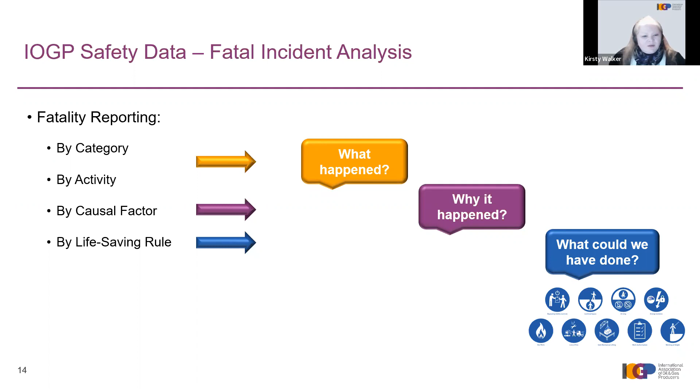If you can go to the next one, please, Alex. Thank you. So all the data I'm going to be presenting today, with one caveat, is available on the IOGP Safety Data website, which is data.iogp.org. This is all publicly available information. And on that website, you get the safety performance indicators reports from the last few years. But you can also drill right down into the fatal incident to look at the narrative description, the what went wrong, the causal factor, and also get the activity, the cause, and the life-saving rule for each of those incidents.

Now, the caveat is that for the 2021 data that I'll be presenting today, that has not yet been finalized. The 2021 Safety Performance Indicators report should be available within the next month or so. Next slide, please, Alex. Thank you.

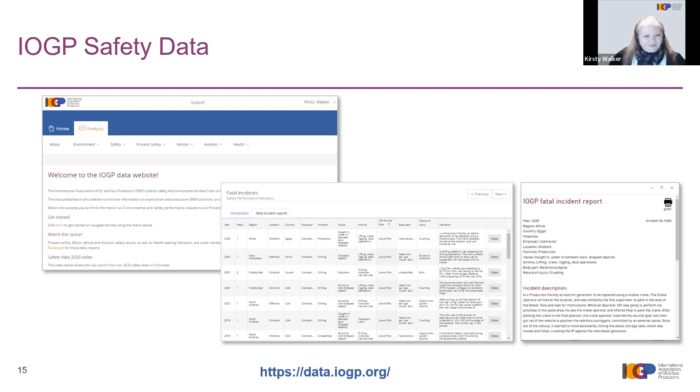So within the Safety Performance Indicator data, as I said, we can look at things in terms of the categories and activities. So the data analysis that I've done for this particular presentation is from 2005 to 2021. This includes 1,085 fatalities in 817 fatal incidents.

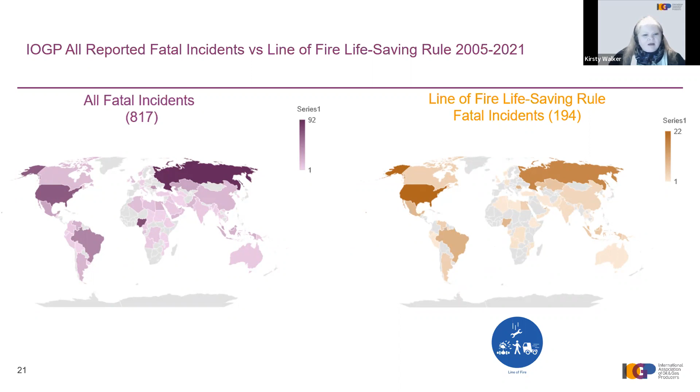One question that I'm quite often asked from members of the IOGP Safety Committee is whether or not there's any particular geographic influence on fatalities or fatal incidents, particularly around line of fire. On the left-hand side here, you can see all of the fatal incidents plotted geographically. On the right-hand side, the ones related to the line of fire life-saving rule. And as you can see by the depth of color on both of those charts, there is really no specific geographic influence over this particular metric.

If you can move to the next one, please, Alex. Thank you. So one of the largest categories we have within line of fire is this working around mobile equipment. And this is where the information in the narrative descriptions, the causal factors of what went wrong, really helps us to try and understand a little bit more about what actually happened.

So out of these 57 fatal incidents, 31 of them involved trucks, so heavy vehicles. 21 of them involved construction equipment. This may be bulldozers, JCBs, diggers, road graders, road rollers, that kind of equipment. One involved a forklift, one car, one train, one bus, and one crane, which was not actively being used as a crane at the time, but was essentially just still a piece of mobile equipment.

So although in many instances we actually engage a signaller, a banksman, to guide vehicles, we've seen that 11 of these people who were actually put in place to prevent people getting impacted by this type of vehicle have themselves succumbed to fatal injuries as a result of their position in relation to the mobile equipment. 14 incidents involved reversing.

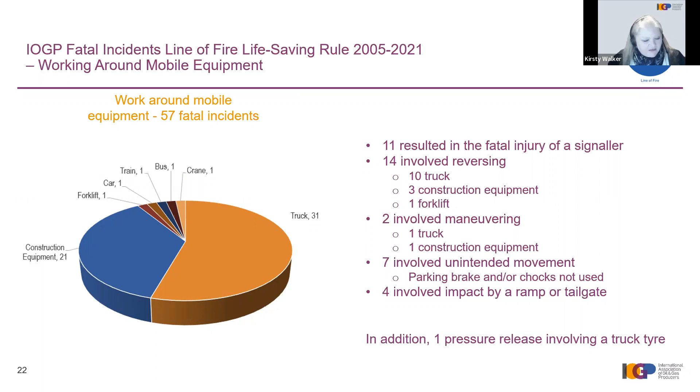So what did we do in terms of the lessons learned? Well, we went back to the IOGP Safety Committee, who then engaged the Land Transport Subcommittee to develop a recommended practice around mobile construction equipment.

This is publicly available, free of charge. You just need to download it from the IOGP website. This document gives advice on risk-based traffic management plans, first move forward, i.e. avoiding the need to reverse, providing space for maneuvering, use of dedicated parking areas, chocks and immobilization devices, and also the use of signalmen or banksmen.

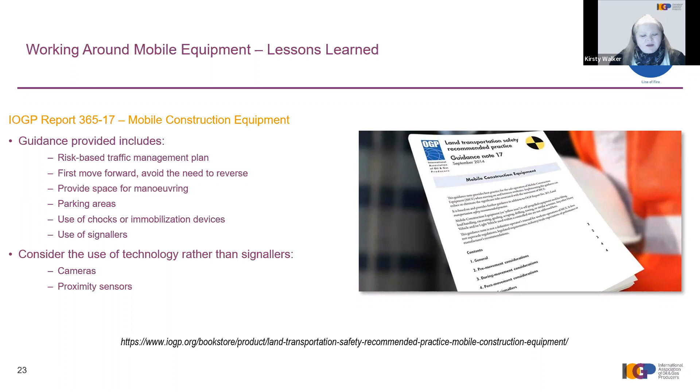But this is an area where we really can benefit from the use of technology rather than having signalmen or banksmen. We can use cameras and proximity sensors on some of these types of mobile equipment. If you can move to the next one, please, Alex.

Now, another aspect that we've tried to really bring the learning from the incidents that have been reported is in the development of our start work checks. These were released at the end of 2021, back in December, and there are 13 of them. These are intended to supplement the IOGP's life-saving rules by giving people a very simple checklist to conduct before they undertake certain types of activity. There are 13 of these, one of which is working around mobile equipment.

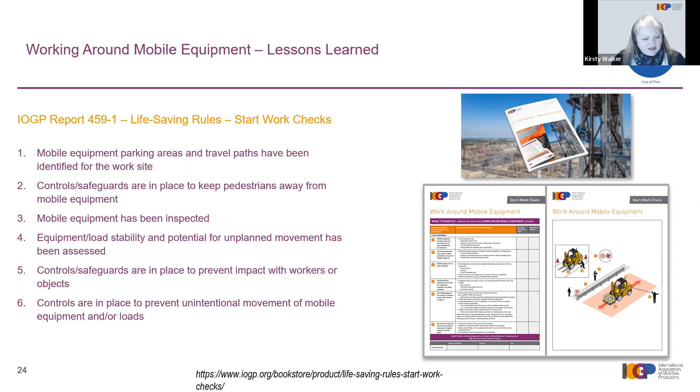The checks are very, very basic: mobile equipment parking areas, travel paths have been identified for the work site, making sure that controls are in place to keep pedestrians away from mobile equipment, making sure the equipment itself has been inspected, load stability, potential for unplanned movement has been assessed, and that controls and safeguards are in place to prevent impact with workers or objects, and also that controls are in place to prevent unintended movement of mobile equipment and or loads. You can see from the previous data that we've tried to incorporate those lessons into the start work check.

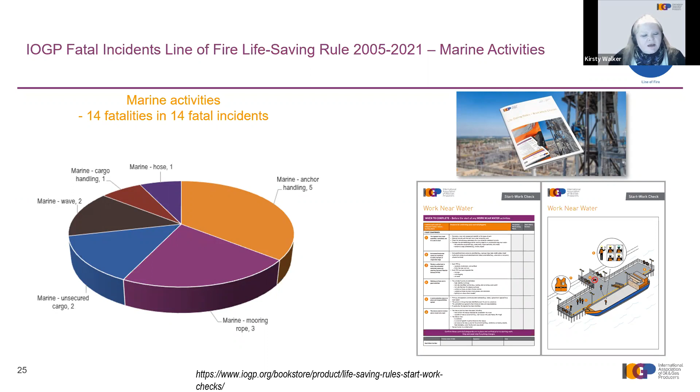Now, another aspect of line of fire is in relation to marine activities, and I'm sure Nick will be giving you some more information on that later in the session. Here we have 5 related to marine handling, anchor handling, 3 related to marine mooring ropes, 2 unsecured cargo, 2 specific to actual waves themselves, another one on cargo handling, and 1 more on the marine hose. So 14 fatalities in 14 fatal incidents. We do also have a start work check on working on or near water.

So some of the other key ones that have come up through the line of fire data analysis is looking at stored energy, energized equipment, and dropped objects. We do have a specific activity category for dropped objects that was introduced in 2019. We do have some specific data on dropped objects, but these are the ones that have been assigned the line of fire life-saving rule specifically.

So for the stored energy or energized equipment, we've had 6 fatal incidents involving wire under tension that were not marine related, 6 involving impact by beam pumps, 3 entanglements in rotating equipment, 1 involved a winch under tension, a stored energy release when cutting pipe, a rotating pump, and a rolling object.

On the dropped object side, mainly from the seismic part of the industry, 10 were related to trees, 8 during deliberate tree felling activities. And IAGC, the International Association of Geophysical Contractors, has identified that tree felling is actually one of their major causes of fatal injury within the land seismic industry.

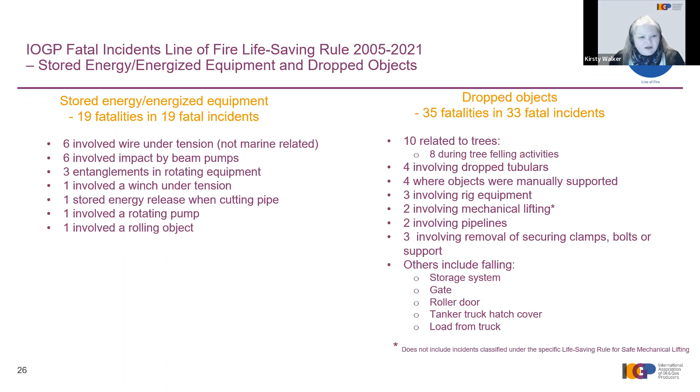So a few more there that you can see with gates and roller doors. On the mechanical lifting side, these are again just the ones in the line of fire life-saving rule category. 7 involved a suspended load, 3 resulted from failure of lifting equipment, 2 from load swinging, 2 from the use of construction equipment for lifting. This is construction equipment that was not designed for lifting, for example, putting slings onto the bucket of a digger. Loading, unloading, again, a lot of these were tubulars.

A particularly nasty one where an operator got caught between a boom truck and the boom itself. And the rest were related to loading activities with skid mounted equipment, trailer ramps, and a forklift operation. Okay, next one, please, Alex.

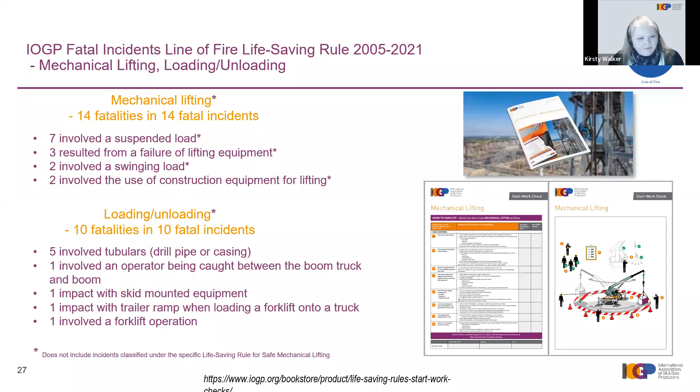So the causal factors also give us another opportunity to look at line of fire from a different direction. From the causal factors assigned for these fatal incidents, we've had 110 assignments of improper position in the line of fire. That's 6.2% of our fatal incidents from 2010 to 2020. We only started requesting the line of fire data in terms of causal factors in 2010.

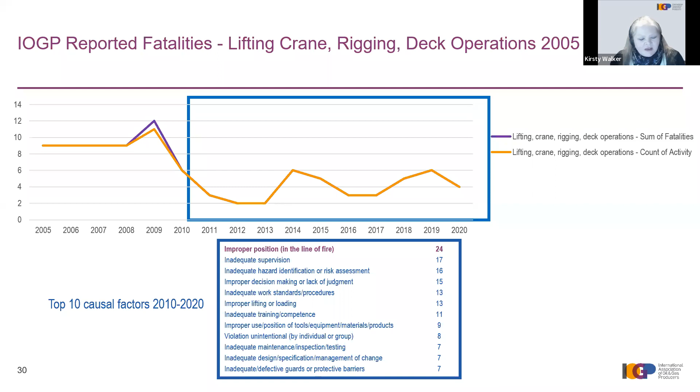In particular for mechanical lifting, out of 45 mechanical lifting related fatalities, 24 of them had improper position in the line of fire. So it really does emphasize the need to manage access to areas where mechanical lifting is being conducted. Really manage your red zones. They absolutely do save lives.

So process safety events. I've put a couple of slides in here about process safety events as well, knowing that Tijs was going to be talking later. Again, the analysis of this data is what was used to develop what IOGP call the process safety fundamentals. This is data from 2007 to 2016, where we did an analysis on 56 process safety events. These are all tier 1 process safety events that resulted in a fatality.

Now, these fatalities are either ignited or struck-by events, almost half of them being ignited, the other half pretty much struck by. These have resulted in 128 fatalities. But the ignited events have resulted in 75% of the fatalities, even though they were 50% of the actual fatal incidents. And almost all of the fatal incidents involving 4 or more people having been killed have all been related to ignited process safety events.

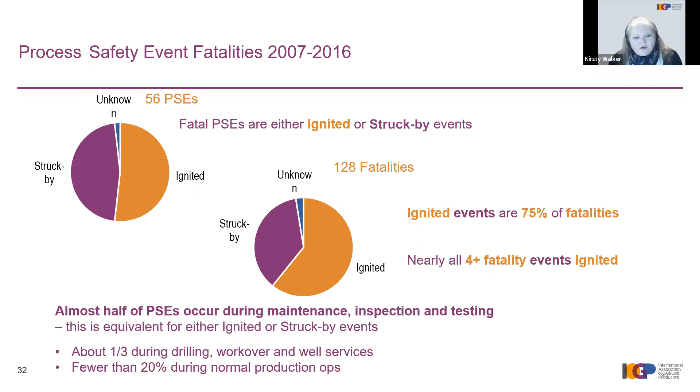But a third of these are during drilling, workover and well services, but less than 20% of them during normal production type operations. And again, the data that we've looked at from the causal factors for process safety events, this is data from 2010 to 2019. Line of fire, you can see, is pretty high up on the causal factors in terms of those incidents that have been reported to IOGP during that time period.

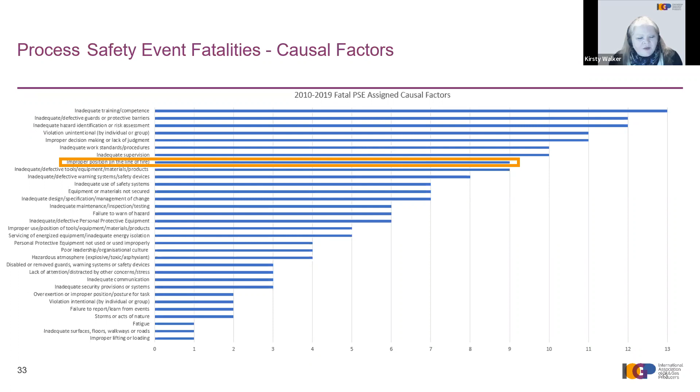And this went to inform the development of the process safety fundamentals, which are slightly different from the IOGP life-saving rules. The life-saving rules are very much for the individuals involved in a particular activity or task and the actions they can take to help keep themselves and others safe. Whereas the process safety fundamentals are more around the kind of organizational type responsibilities, although there is an individual contribution aspect to them. And these, again, the IOGP process safety fundamentals are available free of charge from the IOGP website. The links are on the slides.

So you can see here from those pressure release incidents that we've had 18 fatalities in 17 incidents. The majority of them have been as a result of debris that has been expelled during a pressure release or explosion. There's also 3 related specifically to pigging operations, 3 related specifically to pressure testing, 1 related to a well control incident, and 1 related to a well control flash fire. So again, we've got quite a wide range of incidents categorized as line of fire within the process safety data reporting as well.

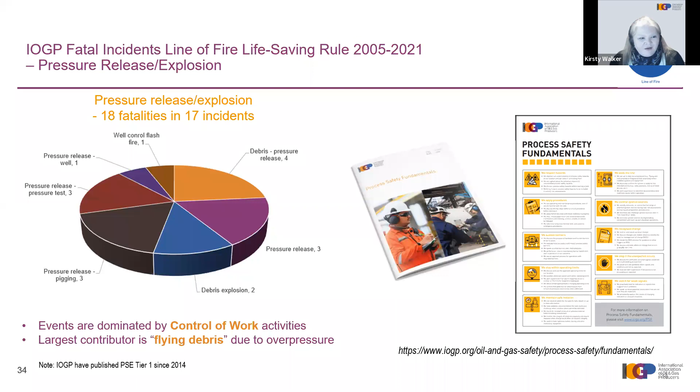And again, IOGP do report separately process safety event indicators and have been doing so since 2014. All these reports are available from the IOGP website if you are interested in any further information on those.

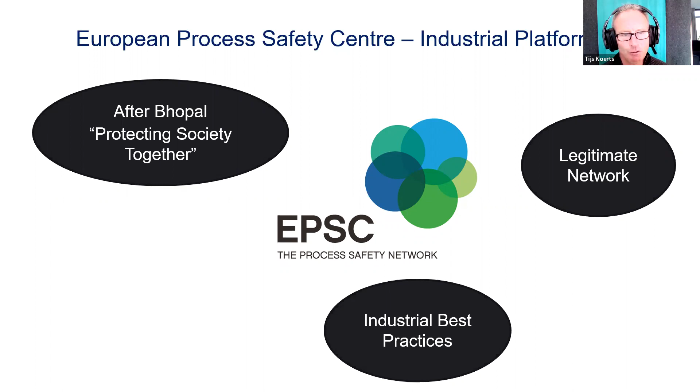Let's go one more slide further. Kirsty already gave you a good insight into how we went the pathway of safety. What helped us a lot was the life-saving rules, and all companies have defined those well. On top of that, we felt the need to develop something called the process safety fundamentals, and I'll focus on the difference, because that's really helpful when you have hazardous chemicals on your site.

I'll go a little into the differences between these three. There's a strong focus on avoiding injuries and fatalities in occupational safety, in the life-saving rules, while the process safety fundamentals focus on avoiding loss of chemical — often called loss prevention. That's the key focus.

The HSE domain is where everybody is involved. These are pretty obvious, simple rules, like buckle up when you're driving, or if you work at height, you are tied off. Straightforward rules. Whereas the process safety fundamentals involve the people really involved in hazardous chemical operations — typically the operators and the mechanical maintenance people.

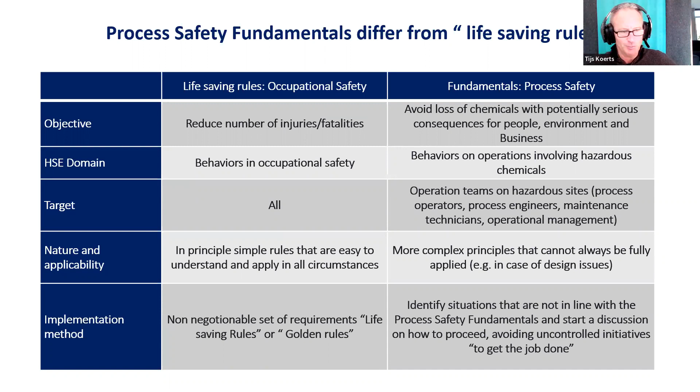So let us go into the pictograms that we developed. These were all developed in line with OGP at about the same time, but not only from oil and gas producers — the chemical industry was also involved.

For process safety, we already have the management system — things like hazard identification, process hazard analysis, management of change, incident investigations. All these principles are developed well, described well, and the booklets are there. So we need to go the next layer down to the people involved in these incidents, very often operators, operational people, and maintenance people, maybe a little design, but these people have been off-site for a long time. So we need fundamental principles to guide people on process safety excellence.

That's basically it, and I'd like to show you a few of those. I hope most of you recognize them — maybe we shouldn't go into all the details, since we're focusing on one today.

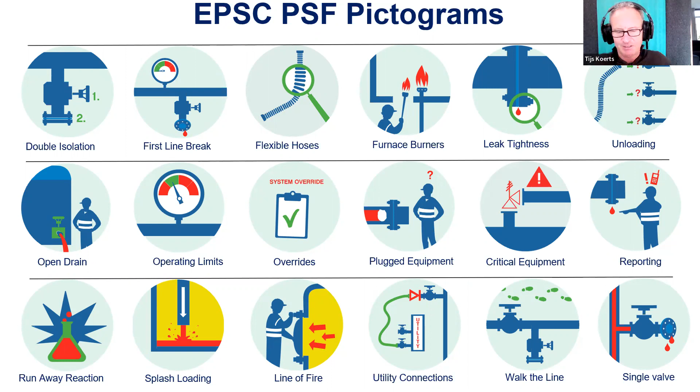Today we will talk—and I see the last line is following up—about do not stand in the line of fire. Let's get to the next slide and talk a little further on that.

One of the 18 pictograms I just showed you—and by the way, I forgot to mention, just like OGP, we have a nice booklet where these things are written, a bit of guidance on how to use them. It has pictures of all the pictograms, and on each one an explanation. That booklet is easy to obtain, free of charge, in several languages. Just look at the website of EPSC, epsc.be—it's in Belgium. Type in epsc.be, click on process safety fundamentals, and you open the booklet. You can also get versions in other key European languages like German, French and Italian.

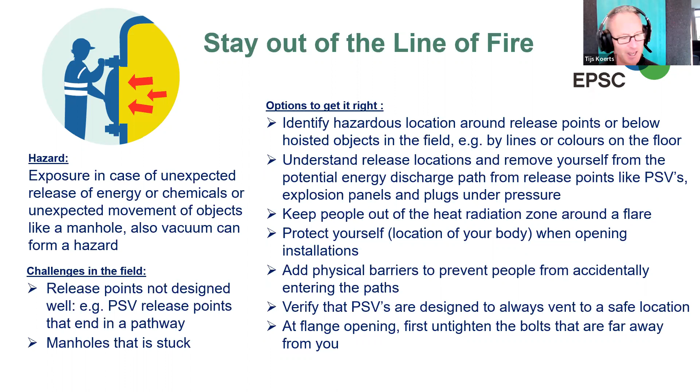Okay, let us go to one more, a little bit of a last one. What we did is EPSC offers you learning sheets. We take a typical incident in the chemical industry that happened most of the time in Europe.

One of our member companies said we had an incident where we want to share some of the learnings. Last year, these learning sheets were made available in about 15 languages, so most European languages are being covered right now. If you want to get them, just go to epsc.be, this is the website, and you can use them there. You can even register yourself so automatically each month these learning sheets are sent to you.

So last year, what we did was relate the incidents to one of the process safety fundamentals. Here a very typical thing was being done: a new part of the refinery was started. They used an old, existing pipeline, cleaned it, and then started using it for transferring naphtha to the unit. Naphtha is extremely flammable.

Now here you see the problem: in that unit, one of the drains was still open. So they started using equipment which was not closed, and they did not validate this. So what are the process safety fundamentals that should have helped here? A very important one is validate leak tightness - that means as soon as you're going to put hazardous chemicals into an installation that has been opened, you first validate that the system is leak tight.

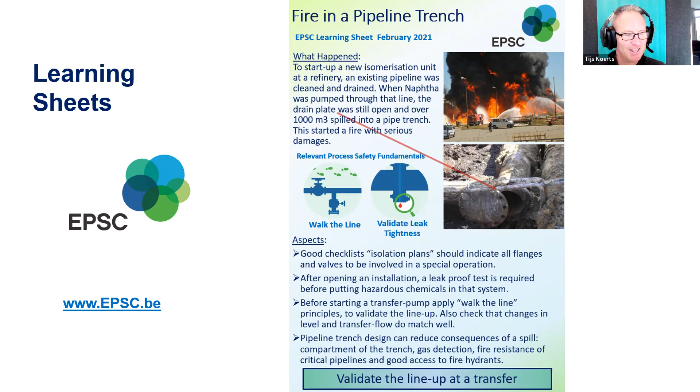The good news is that we're trying to include these learning sheets as well in the EI toolbox, so in the future you should be able to get these learnings from there too. So for me, this is thank you for your attention, and I'm looking forward to answering some of your questions.

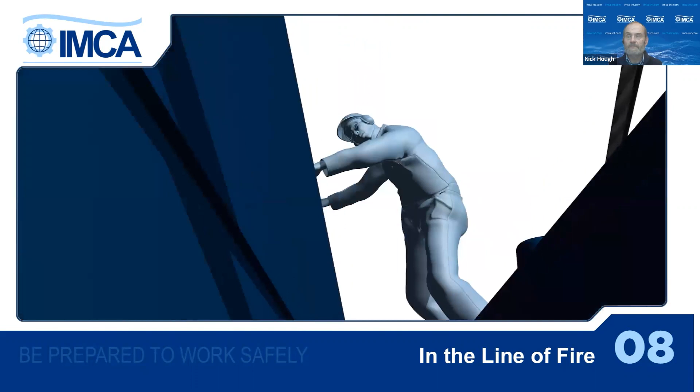Getting caught in the line of fire, that is, being struck by or caught between two objects or entangled in machinery, can result in serious injury or even death. Watch out for potential pinch points. Know how to avoid being in the line of fire. If you're not concentrating, if you're tired, distracted, or rushing the job, your attention could wander. You may not realize you're standing in a place where you could be struck by or caught between objects that might come together. You're in the line of fire. The same thing can happen if you're not properly trained or prepared for the task, or if you're working alone or visibility is poor.

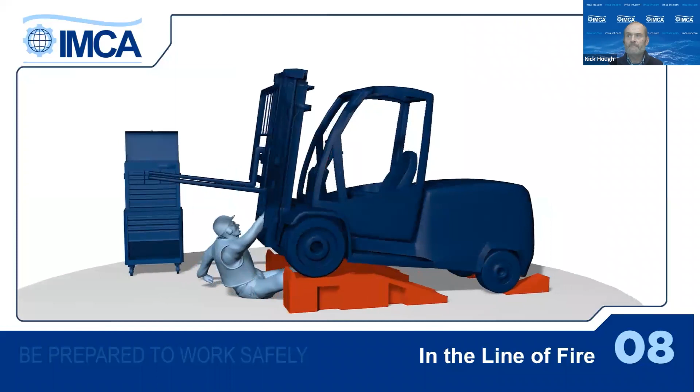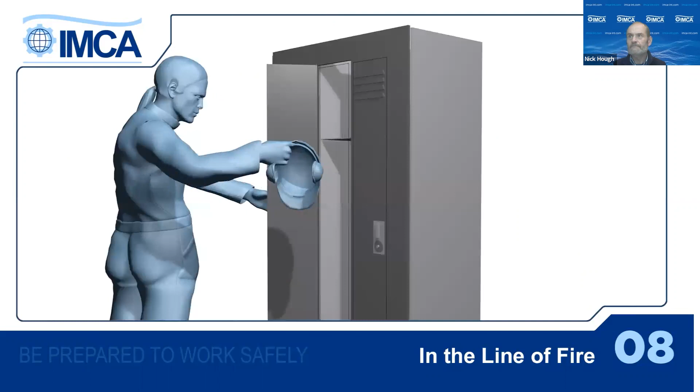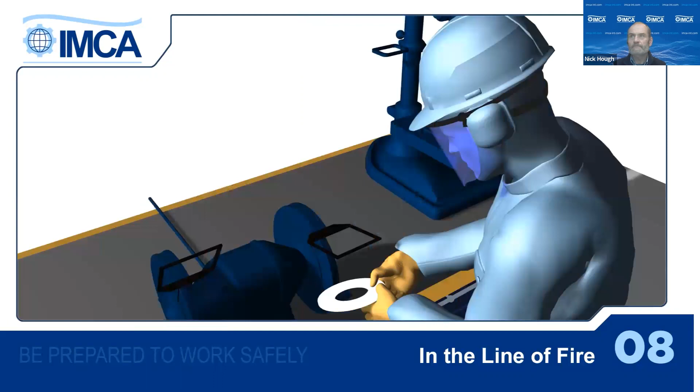Don't work on unsafe or uncertified equipment which doesn't have the right safeguards. If the job involves moving or rotating machinery, stand well back. Wear the correct PPE. If you've got long hair, tie it back. Take off any jewelry and don't wear loose-fitting clothes. Make sure there are guards in place to prevent contact with any moving parts. Before starting a machine, know how to stop it. Be sure you know how the machine works and keep your fingers, hands and limbs well away from its moving parts. Can the machine be effectively isolated? Can it be locked and tagged out?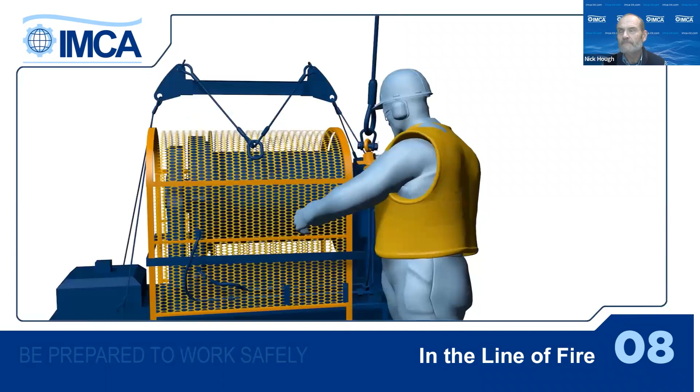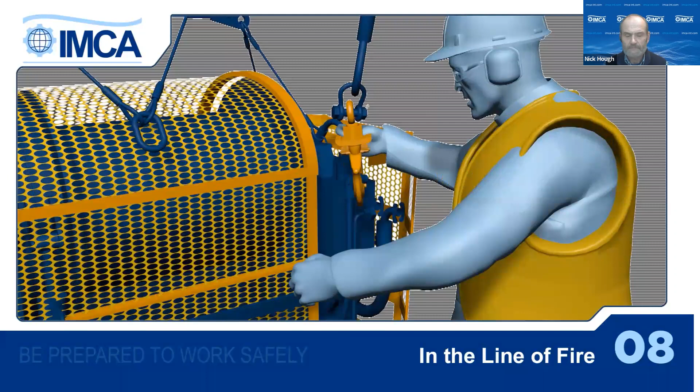When involved in lifting operations or near moving equipment, wear high visibility clothes. Be careful handling slings and strops and follow the correct procedures. If they're suddenly put under tension by a lift, your fingers can get caught between them and the load. Remember, don't place yourself in the line of fire. Always be aware of the sea state. Rolling and pitching can make opening and closing doors, hatches, lids and gates hazardous. Stay alert, keep your balance, and don't stand between moving and fixed objects. Are you prepared?

What you see there is a screen grab of the accompanying pocket card, which is available with the video. If you could go on to the next slide then. Thank you. Just take a step back first.

IMCA is the leading trade association representing marine contractors and the associated supply chain in offshore marine construction. So we're building stuff offshore, doesn't matter what, whether it's windmills or oil and gas equipment. We have 700 odd members playing a key role in offshore oil and gas and renewable energy construction across something like 65 different countries, primarily in engineering, construction, and installation of wind farms and hydrocarbon facilities.

Our mission is to improve performance in the marine contracting industry. We do that through conferences, seminars, and a big network of committees doing a great deal of work, through dialogue, matters like this kind of webinar at the minute with regulators, oil companies and renewable energy companies, and by promoting areas of common interest: health, safety, quality, the environment, and technical standards. There's also a large library of technical and operational guidance available to members.

If you go to the next slide please. Safety is at the heart of IMCA's work. That includes safety flashes, of which more in a minute, safety statistics, which along with IOGP we are collecting from contracting members at the minute, bulletins, briefings and publications, and safety promotional materials with 15 short, excellent videos on the theme 'are you prepared to work safely?' Line of Fire is only one of them, and I recommend them, as well as some longer videos.

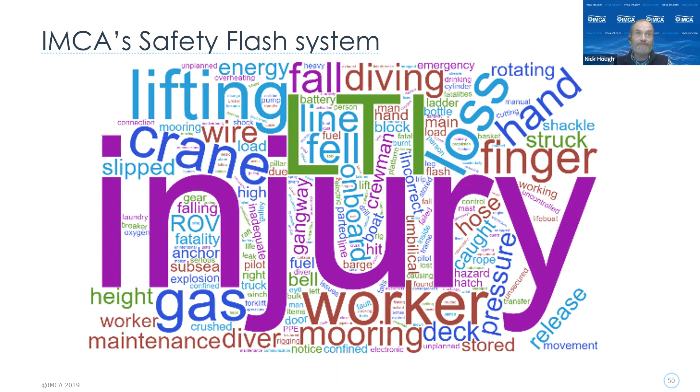After a while you start to notice trends, you start to notice things emerging. Now, Kirsty was right earlier to point out some of the synergies between the IOGP data and the marine side. The line of fire causes are evergreen - if only it weren't necessary to say that. Mooring, lifting, release of stored energy in various places - the same patterns do emerge.

Now, I encourage members to send me information on safety flashes, and we publish it anonymously. These are just some of the principles I'm outlining when we do that. We're about the safety story. I can't publish everything, but there's a certain amount of journalism involved - we try to publish what we can to raise standards and get incidents that actually have high impact.

And we're talking about plain English. We're not going to say 'commence operations' when we can say 'start work'. We do look for simple steps: What happened? Why did it happen? What were the causes? What do we do to make sure it doesn't happen again?

And a key learning that's starting to come through at the minute is not only what went wrong, but if we want to prevent unwanted incidents, we might want not to change what we did wrong, but reinforce what we did right - and that's something we're looking at now. What went right? Why did this go well? Why have all of us finished this with 10 fingers?

Next slide please. This is by way of illustration then. IMCA and its members are aligned to IOGP's life-saving rules. Our members are not obliged to make use of them, but we do strongly encourage standardization and common industry practice. And you'll see that one of those rules is line of fire, of course.

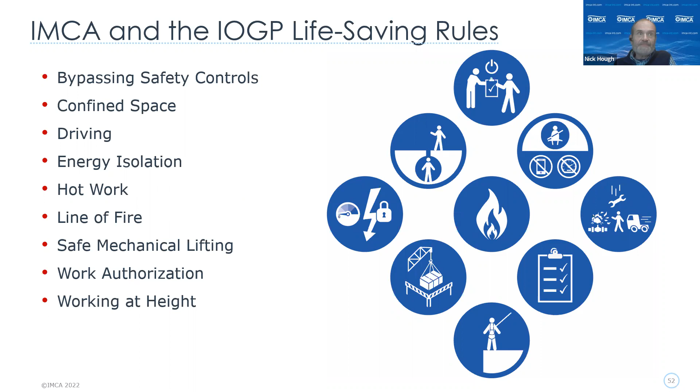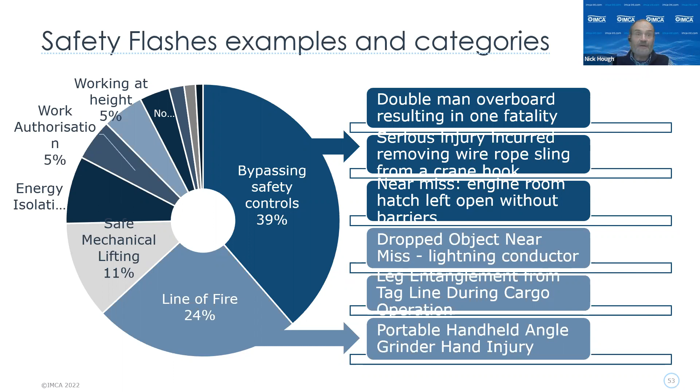We got in the way of pressure releases or the release of stored energy. We see that with some of the things Tijs has been telling us about. We're in the line of fire if we stood under falling objects, or if we fail to establish barriers and exclusion zones, or if we disobey existing barriers. Then we place ourselves in the line of fire. And if we take no action to secure loose objects or report potential dropped objects, again we're placing ourselves in the line of fire. There's a key learning there for all our field crew and for ourselves if we took no action. Next slide, please.

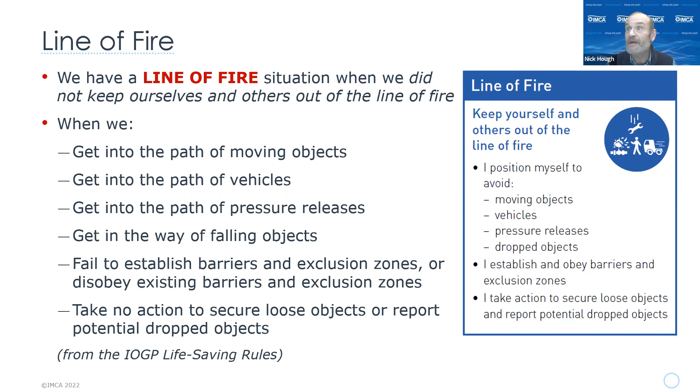Thank you. We'll drill down a little deeper into some of the most recent safety flash incidences. We're looking here at around about 480 odd safety flashes, pretty much through the COVID time, actually, from October 2019 to the present. You can see there the colours on the right - about a quarter, 128, were line of fire.

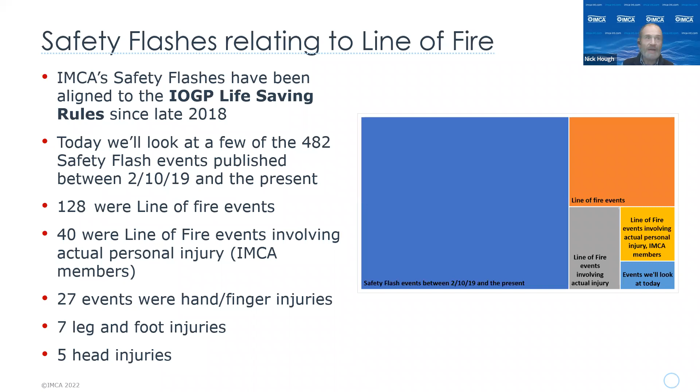40 of them were line of fire injuries involving actual injury to the employees of our members. Drilling down still further, 27 were hand and finger, and there's a number of leg and foot injuries and head injuries as well, but it's on hand and fingers that I'll focus now.

Thank you very much. In the next slide, and I will only change when I give you the nod, there's 21 line of fire injuries to workers' fingers and hands. 6 of them were LTIs. And what cost, what human cost to our members and our members' employees?

Broken fingers, crushed fingers, lacerations, trapped and bruised bits of fingers, hands torn off or amputated. It's not being made up. When I sent this presentation to one of my colleagues to look at it, she thought there'd be lots of gory pictures, and she was saying, I don't want to see that. I thought, well, no, we won't do that. There's no need, but those pictures are out there. That's people's lives that have been changed.

So what do we need to do to stop our people getting their hands and fingers in the line of fire? I could sound like a broken record. What do we need to do to stop our people getting their fingers in the line of fire? How do we strongly encourage that safe behavior, that safe attitude, the principle then that getting the job done is not more important than risking your fingers? Next slide, please.

I won't read this out, but even a quick look at - apologies - I won't read the list out, but even the titles, and I choose the titles, provide you with a lot of information on what happened. Conclusions can be drawn from what looks like a sorry tale of woe. Now, I worked with someone who did a lot of work at the post office, trying to get postmen to work more safely, not get their fingers bitten by dogs, not fall off their bikes, that kind of thing. He said to me, Nick, it's not rocket science.

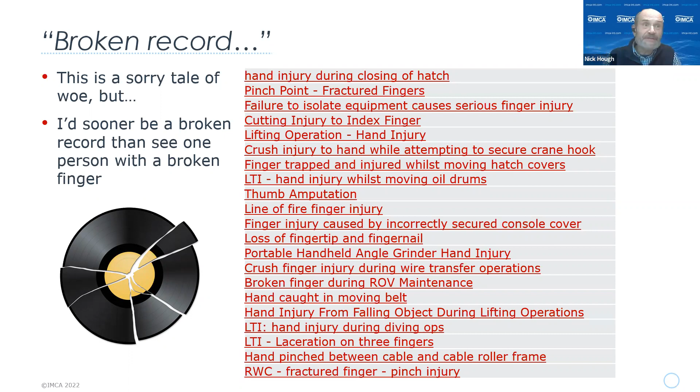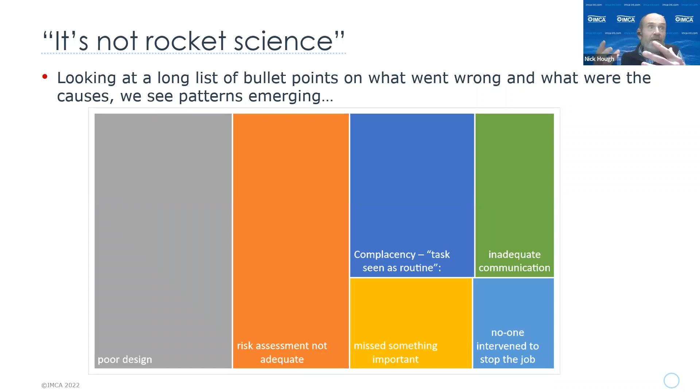Next slide, please. There's a tendency to make safety more complex than it is. I stand against it. You don't need a TapRooT analysis or a bow tie diagram to see what went wrong in many cases. Of course, detailed analysis can and does reveal important insights, but we can see here that in half of all these cases, someone injured themselves either because the workplace or equipment wasn't designed to prevent such injuries, or because the risk assessment was deeply inadequate.

Another factor I might come back to again and again, a trend you see when you look at a lot of safety flash incidents, is what I call task seen as routine. We've done it before, we know what we're doing, we're experienced, until all of a sudden, bang, nine-fingered Frodo. Right back to my friend the plumber at the beginning, who made a lovely slice in his finger by not putting his gauntlets back on.

I would add as a small disclaimer that this information is not statistically authoritative, it is indicative. It's most interesting also to see that in Kirsty's data, risk assessment or inadequacy of risk assessment is a significant causal factor. So what could we do better? How do we stop all this from happening? Next slide, please. Thank you.

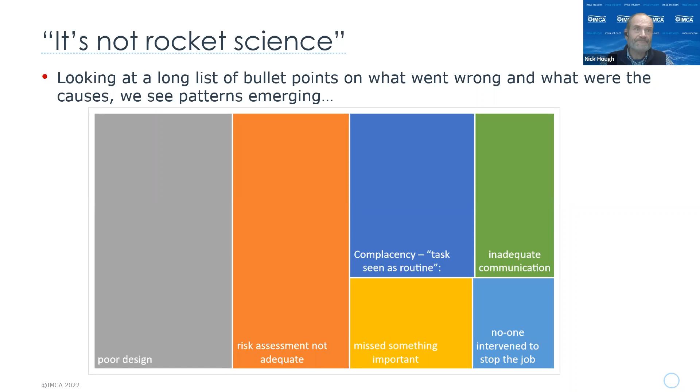These are my conclusions rather than IMCA's, but I'd outline three things. Firstly, safety by design. It's very often that equipment's just not designed, or situations aren't designed, with the operator or worker's hand safety in mind. I know it's costly to redesign things like that, but our primary focus ought to be on designing the risk out. It's interesting to note that Tijs noted earlier that design issues are a problem in process safety as well, and we do acknowledge there may be more complex issues at stake.

Second, we need to ensure better risk assessment. If we can drop back up one, please, thank you. Better risk assessment - are our workers daunted or put off by risk assessment? Because it's clearly not effective in a lot of cases. Some people perhaps are going through the motions. How to improve that? And still others are missing things that could harm them. Again, as Tijs notes, identifying situations that are not in line with safe fundamentals.

Let's start a discussion. How do we do that? How do we move away from getting the job done being more important than our hands and fingers? And thirdly, we need to value our hands and fingers more than our work. We've just seen someone from a certain company described as a shameless criminal by an MP. No one but a shameless criminal would ever tell their workers that getting the job done is more important than risking their fingers. But still, they are risking their hands and fingers, be it through complacency, be it through missing something obvious, be it not thinking properly or having poor situational awareness.

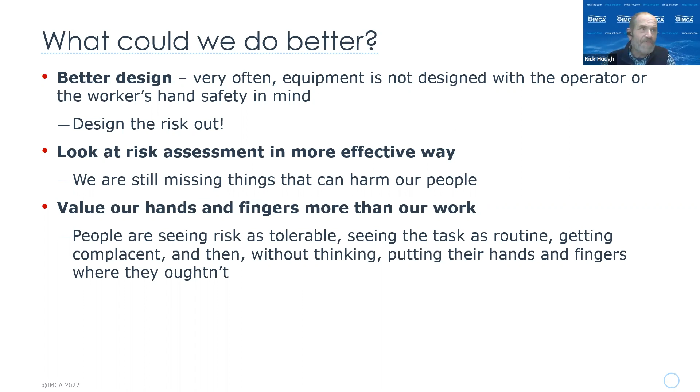So let's look at finishing off by seeing what our members did in fact do. Thanks.

Improving design comes at the top. I can think of a case where someone got his fingers nipped in a lifting operation involving oil drums, and the result was that someone designed rather a clever piece of equipment that enabled them to be lifted hands-free. Sometimes it's a quick, easy win. I like the coloured floor, the physical barriers, in Tijs's presentation - that was a good slide. I was reminded of an incident we published a while ago where an engineer went to open equipment in an unmanned engine room, wearing shorts, and a whole bunch of slurry came out and badly burned him.

These things, that's precisely the kind of thing Tijs means. Now, it may be that risk assessment needs revising, or needs relearning, or actually following through. Our members instituted further training, or they changed procedures to eliminate the hazard. Two things in there that are fairly low on the list, fairly small, but I think they're anomalously low, but deeply important. One of them is the need for better communication - that's another trend I can see after looking at safety flashes year on year on year. And the other is better use, or good use, of the stop work authority. I know that can be difficult to achieve for cultural reasons in some parts of the world.

So on to the next slide, please. Thank you. So in brief conclusion then, I think there's a great deal of line of fire incidents that are hand and finger injuries, and it's fair to say that we have a way to go before we can eliminate what the UK's Health and Safety Executive will call completely preventable line of fire related hand and finger injuries. So what do we do now?